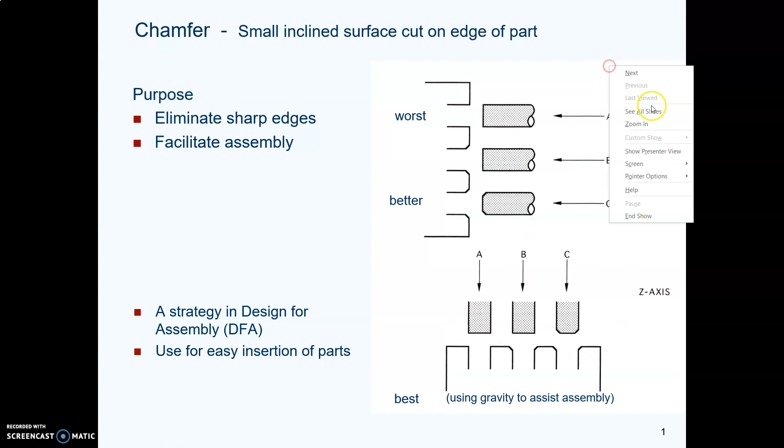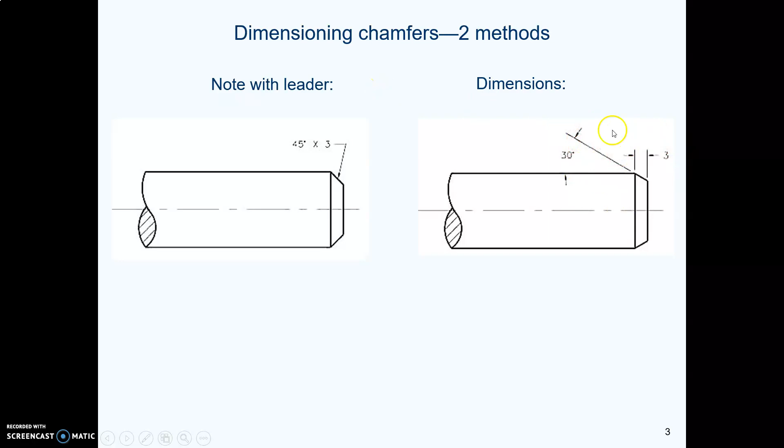There are two ways you can specify a chamfer on a drawing. You can use a note with a leader, or you can use dimensions. This one is backwards. If the chamfer is at a 45-degree angle, and many of them are, then you can use a note. And think about a 45-degree triangle. A 45-degree triangle has the same angle in both corners and the same length of side on both sides. The slopey length is different. The two short sides are the same length.

So that means you could point at a chamfer that's a 45-degree angle. You could say, for example, 3 millimeters by 45 degrees, and the 45 means both directions have to be 3. If you would rather, you can use a note that says 3 by 3, which implies that it's a 45-degree angle. Notice the pin on the right here has 2 times 3 by 45 because there's a chamfer at each end. Also notice on the pin that we see an edge where the chamfer was cut.

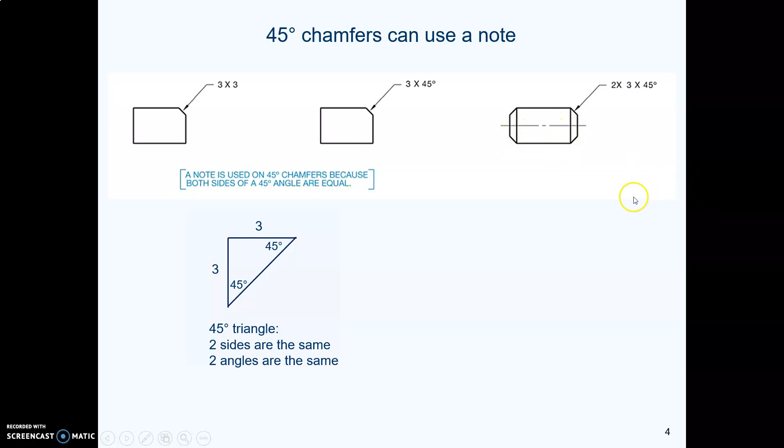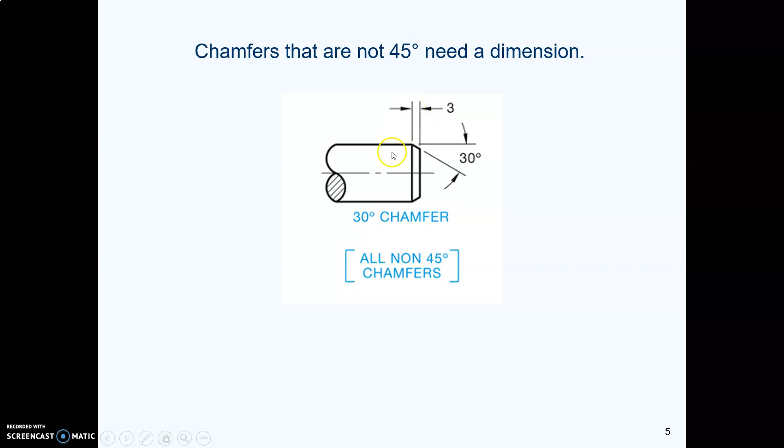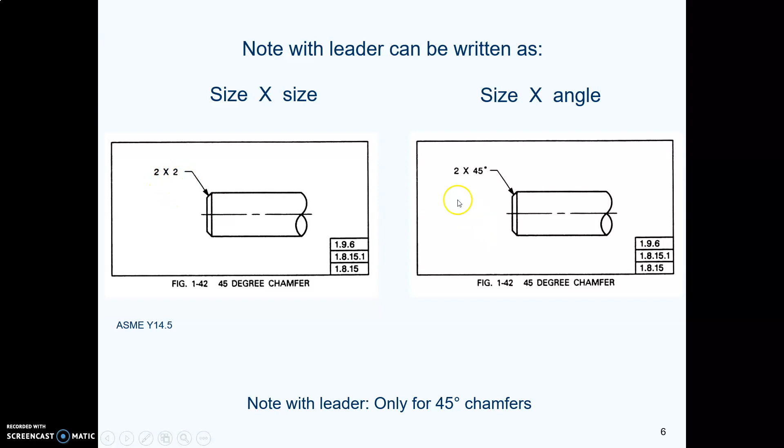If you have a chamfer that is not 45 degrees, then a note will not work and you have to use a dimension. And you can dimension pretty much any direction you think is best. Here's an example. This is a pin and the dimension says start 3 millimeters back from the end and cut at a 30-degree angle. This is ASME saying if you have a 45-degree angle, you can say size by size, or you can say size by angle. Here's an inch example, 0.125, what is that? That's an eighth of an inch. So 1/8 by 1/8, or you can say 1/8 by 45 degrees.

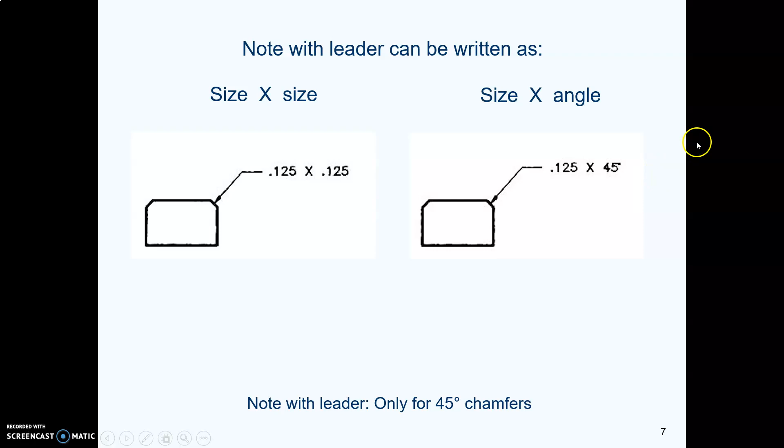If you're dimensioning these, ASME gives us a number of different directions we can go. Here on the left, we see here's the outside diameter of the hole. It's a 0.75 diameter and cut at a 30-degree angle. And you might say, hey, wait a minute, don't we need the depth dimension too? No, we don't, because we start at a 3/4 inch diameter, we cut a 30-degree angle, and when we get to this smaller hole, that's it. That's the end of the cut, and it is whatever depth it turns out to be.

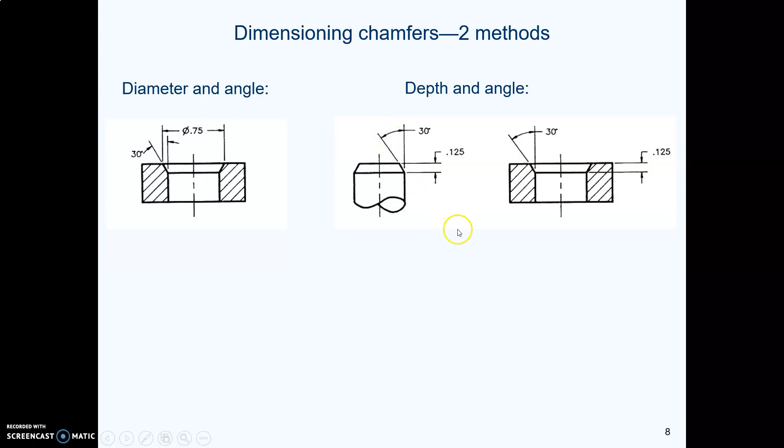I just want to remind us once again when we use spaces and when we don't use spaces. So if we have a note that's talking about a chamfer where we say size by size, there are spaces in there on each side of the X, because the X means by. However, if we are talking about how many there are, for example, 8 holes that are this size, we say 8X, no space there, 8X, then a space, then the size. So when we're talking about quantity, no space. When it's a note that says something by something, then there is a space.

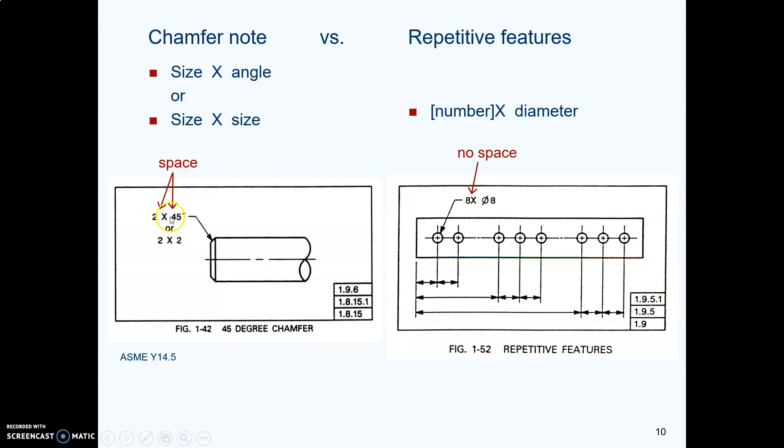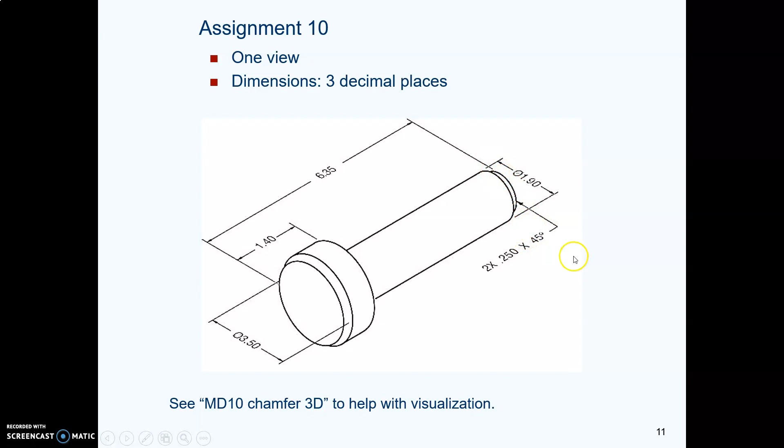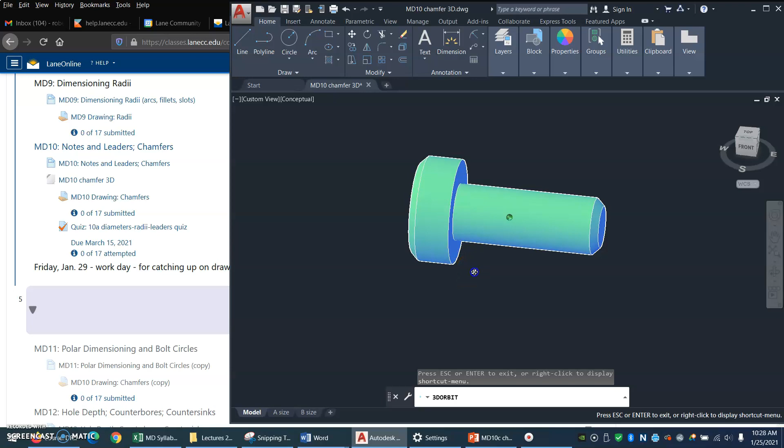Let's go look at our 3D thing. So here's the 3D drawing, and I'll come over to the navigation bar and get the orbit command. I just wanted to provide this to you so that you can visualize what that chamfer looks like. See the chamfer on each end? You can visualize what it looks like when you're looking straight on at the side view.

Notice how when you have a side view, that edge where you cut the chamfer is visible. There is in fact a line that goes up and down where that chamfer was cut. So there is a line there. We'll stop here and we'll come back and look at CAD in the next video.